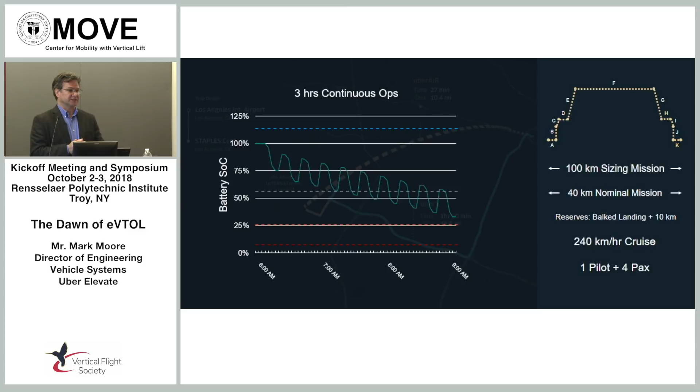But if you push to really high disk loading, for instance, like the Lilium concept, there's all sorts of problems that happen there, where high disk loading requires really high C rates in the batteries, high discharge rates. That's problematic. And so what we're about is being able to achieve essentially the 60-mile longest trip distance.

But also what's actually more important is that we can fly for 3 hours during the peak in the morning and the peak in the afternoon, and at most sit on the ground for 5 minutes when we load and unload passengers and get a little bit of recharge, enough to keep us going, so that essentially we have this sawtooth distribution.

We're constantly running the battery capacity down, which is the vertical axis, but we're able in that 5 minutes just to get enough charge so that we can do the next 25-mile average mission, get a little recharge, bounce the energy state back up, so that for 3 hours straight we can operate just with those 5-minute loads and unloads recharges. That's the harder mission that we're designing for.

So just a little bit more of this trade-off of cruise efficiency and disk loading or hover power required. You can see multicopters really inefficient at cruise, going across the horizontal axis to the right, a tilt duct with high disk loading like the Lilium concept going up to require a megawatt of power in hover. So the sweet spot is kind of in that corner, right? Which compounds have been trying to achieve for 30, 40 years.

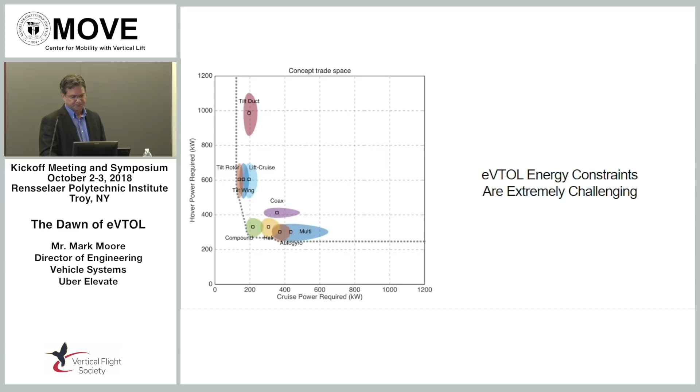But in my perspective, since the mission is just really short in terms of the hover requirement, you want to bias more towards a little bit more power and a little bit more cruise efficiency than where compounds are or have tried to get to. So it is a very challenging set of energetic constraints that exist.

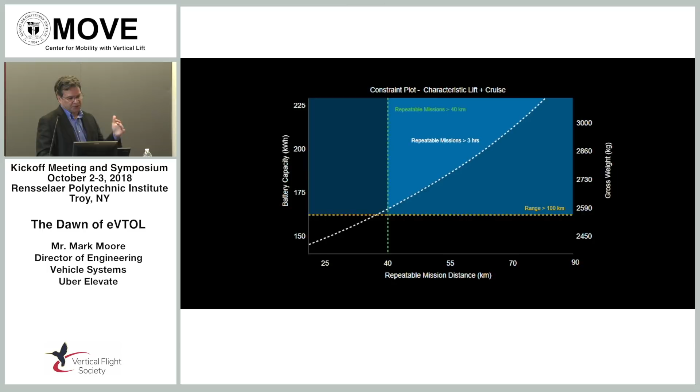So again, for that 60-mile range, for an average 4-passenger vehicle plus a pilot, which tends to be, from our different sizings, anywhere from 4,000 to 6,000 pound vehicles. Then in order to be able to do the repeatability, that sets essentially a constraint. And you can see that the battery size for that 4-person plus 1 pilot vehicle ends up being at least in this 160 kilowatt hour pack size, which is quite a bit bigger than where the automotive world is now, which is 100 kilowatt hours and below.

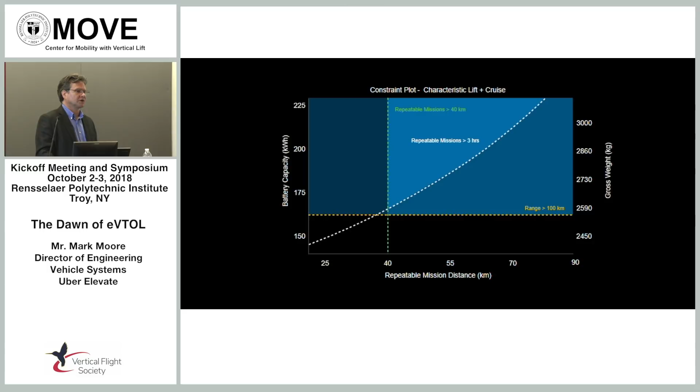So the energetics are definitely challenging, but even with the current 250 watt hour per kilogram cells, they are very close to getting what we need. The harder part is not actually the specific energy, it's that rapid recharge. And so right now the cells are just not quite good enough to do that rapid recharge unless we drastically

reduce the cycle life. We'd like to have 2,000 cycles on these batteries so we can amortize them and they can be well affordable. Right now, they're in the few hundreds, on the order of 500, if we abuse these batteries with these rapid recharges. So very much we need to push to chemistries and to liquid cooling systems that can get that heat out or distribute the heat or not have the heat with low resistance internals.

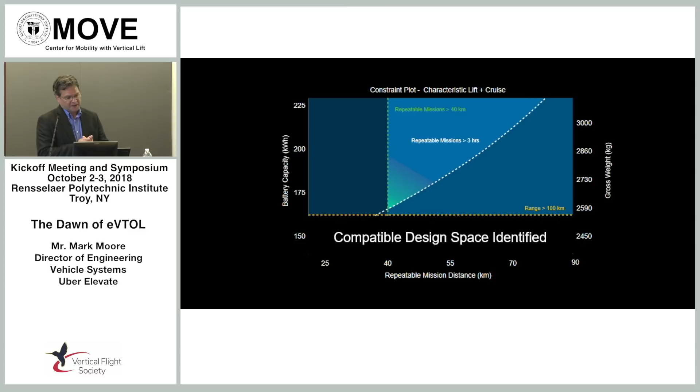So in terms of different concepts out there, we do competitive analysis, comparative analysis across the different concepts so that we understand what's good or bad for our missions. Again, we're not designing aircraft for pleasure, but to understand the competitive landscape and what will best serve our market needs. So just a little bit about some of them that you've seen that are real vehicles.

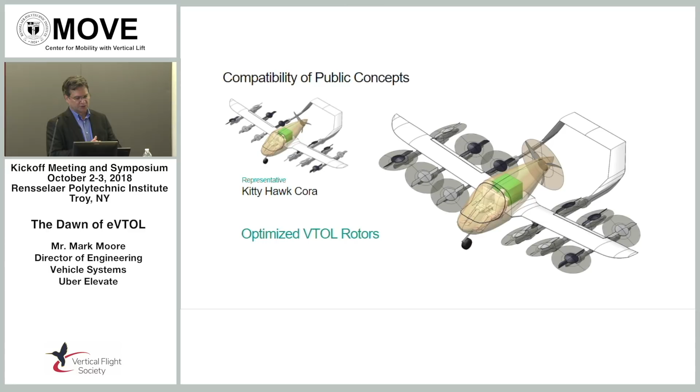So you have the Kitty Hawk Cora, which is flying today, really has made this decision, as a lift plus cruise, to be as dead simple as possible, right? The smart strategy in aerospace, KISS, keep it simple. No articulation, no moving parts, but the price you pay for that is lots of parasite drag.

So this aircraft can go 110 miles per hour, but the L over D max is much closer to 70, 80 miles per hour. And when you have a severe energy constraint, you want to be cruising at that lower speed. So a 70 to 80 mile per hour vehicle just isn't going to meet our needs. And especially trying to make money with a 2-passenger vehicle is just not the throughput that we need.

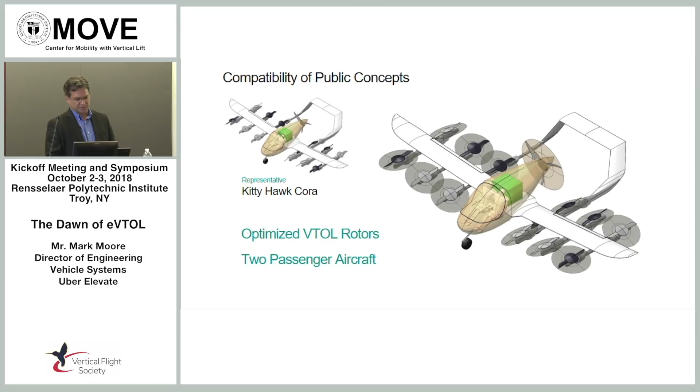So again, looking at other concepts, you have the Joby S4. Again, from public disclosures, that is actively flying. It's a full-size vehicle that has done many transitions and cruised. And they're kind of like at the opposite end of the KISS, right? They're embracing quite a bit of complexity where they have 6 tilt rotors. And you know, that's one of the things we're trying to get away from with helicopters, right? We're trying to get away from those 10-hour inspection intervals or high maintenance costs.

And it's interesting as you compare these two vehicles, the Joby is very capable. It's a high-speed aircraft, no question about it, from our analysis, but they're, again, at two different ends of the extremes. And as an aircraft designer, I can tell you, the right answer is typically somewhere in the middle. And so I'm definitely looking for the concepts that can have the high reliability and low maintenance costs of a Cora, but the speed and productivity of a Joby S4. So that's my ideal world.

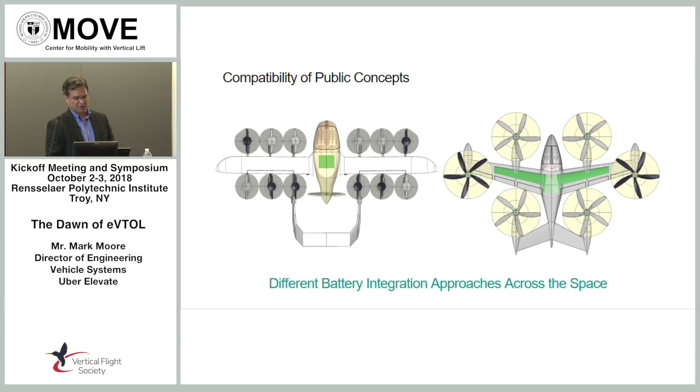So I am a big believer that we're just in the first generation of distributed electric propulsion, and that most of the concepts are pretty brute force-ish. They are flying Cuisinarts. They're just propellers all over the place. And I think in the future we're going to be able to do a lot better than that, but it's going to require especially the universities and the government labs and small companies being willing to invest in new technologies that especially take advantage of these electric motors and digital controllers.

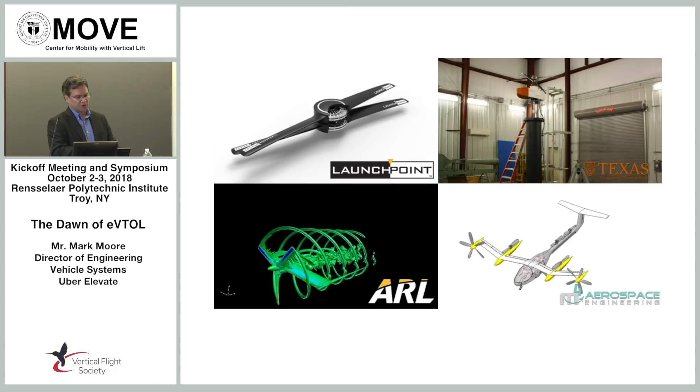So one technology that we're excited to be working on with the Army and UT Austin is stacked co-rotating rotors. And I say that this is an electric technology because what's really unique about it is this ability to have two independent motors, each one can control its own rotor, but they can be synchronized with great precision. So we can have the rotors with any azimuth separation; at low speeds, at high speeds, they can keep that azimuth separation. Now, why is that interesting?

Because Sikorsky and others have proven that this gets you an improvement in your figure of merit and an improvement in noise. They're not huge, 4 to 6% figure of merit increase, 2 to 3 dB decrease, but both are going in the same direction. And we have this ability to now stow the props because each one is driven independently by a motor and have a relatively clean interface.

And in fact, if you think about it, like for the Joby S4 concept, as it's going through transition, it's doing that 90-degree rotation. So the cyclic forces, which are 10 times bigger than the normal forces in axial flow, are all being transmitted into that articulation. So it's a really complex articulation in terms of loads.

What's neat about the stacked co-rotating technology is that we can pop these motors up and with a simple cam mechanism, pop it out of a nacelle, and there's no loads on it during that articulation. The cyclic loads don't start until we start rotating that rotor. So to me, if we're going to embrace articulation, it's embracing smart articulation with very low loads on that articulation mechanism.

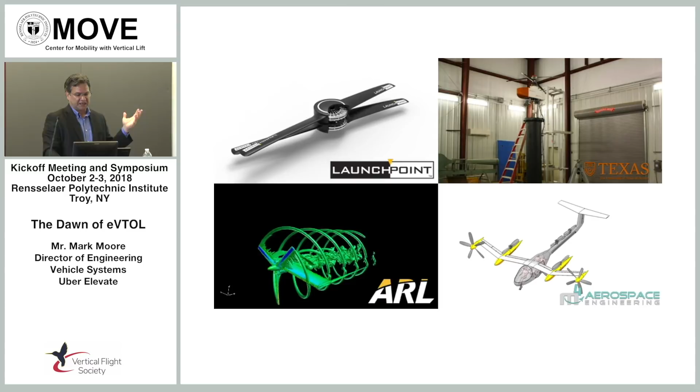Here you see, again, we're never going to build this vehicle. We're showing this as a vision concept that could utilize this stacked co-rotating technology. Again, not counter-rotating, but co-rotating. All right, so I'm going way too long because I'm too excited about the different things.

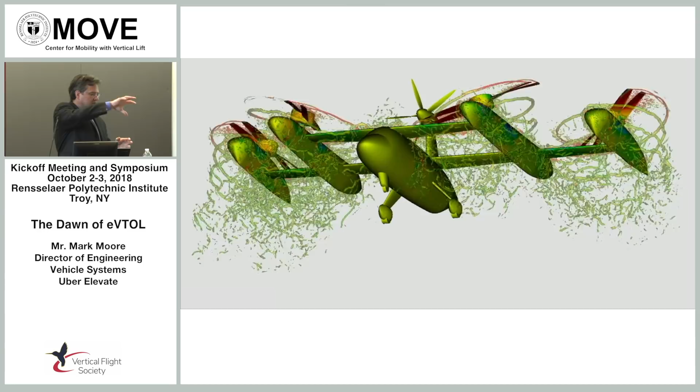I just wanted to mention briefly, we're getting into really tightly coupled aeropropulsive problems here, and that really demands great new tool sets or applications of tools that have been developed in new ways. And so a lot of what we're doing, especially with our partners, is trying to advance the tools and prove out across the variable fidelity tool sets from CHARM to OVERFLOW and PowerFLOW and vortex particle codes, everything in between, how we can do rapid design or how we can help them do rapid design by proving out the lower fidelity tool sets.

And we're focusing on one specific area, and that is acoustics. They're designing the vehicles. They're the experts at designing the vehicles. But not enough attention has been put into achieving great acoustic signatures and low community noise. So we think that's a key differentiator that we want to enable our partners to be the best on the planet at, because we know that that is going to be the challenge for us to get into the market with these services as we talk communities into having skyports very, very close to where they live and work.

So as you see us develop these different concepts, they're nothing more than the equivalent of concept cars. They're never going to go into production. But speaking of production, we've got to realize that these vehicles need to be designed to achieve production rates that haven't been seen since World War II. We need thousands of each one of these aircraft being manufactured per year. And in a relative few years, we see the need for 10,000 units per year being produced for our needs.

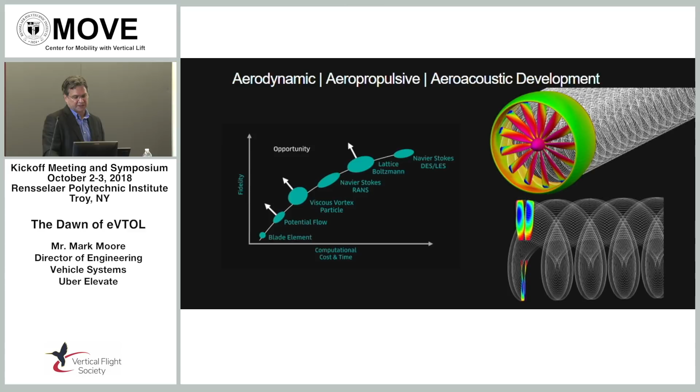So we think that there's this natural blending of the automotive and aerospace markets that needs to occur, and we're trying to help facilitate that, again, with and through our partners. So again, there's so much interesting variable fidelity tool work to do and to talk about, and again, we're excited that we're doing some of that work with the Army, as they have an incredible expertise, especially in this area of close coupling aeropropulsive problems.

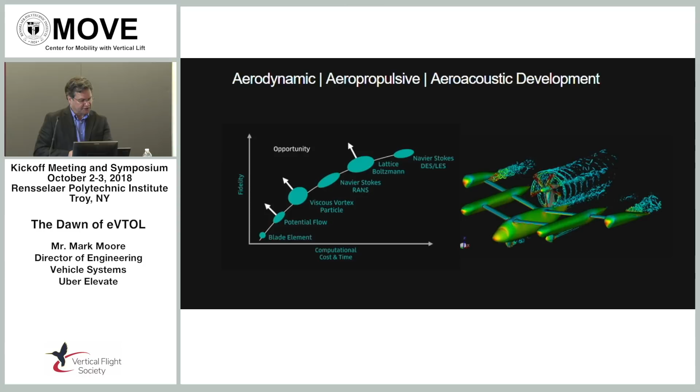So I'm just going to end. I've talked only about the vehicles because I'm a vehicle guy, but the feasibility of this market is not just about the vehicles. It's about this whole ecosystem coming together. And this ecosystem has to be designed for the masses. Again, we have 10 million riders a day at Uber. And we're growing somewhere between 70% and 120% per year. So we've got a lot of customers that are ready to ride in your vehicles. We just need to put all the different pieces together.

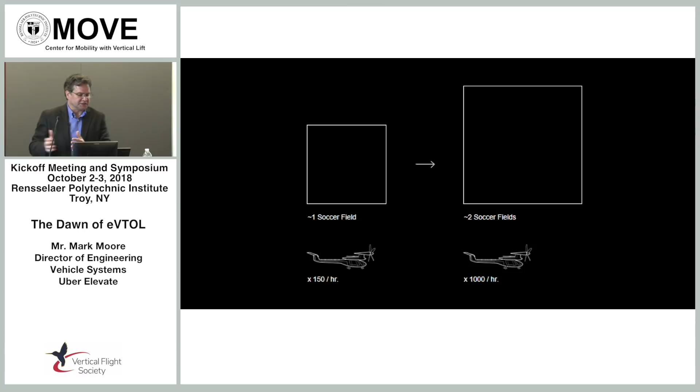Well, you know, we have a crawl, walk, run strategy. So in the beginning, we're going to adapt elevated parking garages and take advantage of that top deck in order to put several different pads. You'll notice that we tend to do this layering effect where we can have essentially storage for the vehicles and emergency landing pads also embedded into the design.

But as I show you several different solutions, because we invited some of the top architectural firms to actually ideate with us and develop different skyports, you'll notice that each of them tends to be elevated above the ground to help get that noise signature away from people on the ground, but also be co-located with ground transportation, roads, major thoroughfares. And that's both because we need to be multimodal, we need to connect into other ground transportation, and because we want to take advantage of the noise that those cars already make, and ideally even blend into that signature and design these aircraft to have the same signature as those highways.

And that's one of the reasons why we've already collected about 6 months' worth of highway data at different potential vertiport locations, so that we can see exactly what that spectra looks like and figure out how we can help our partners design to map in and hide within that noise band that already exists. So many different ideas for what vertiports will look like.

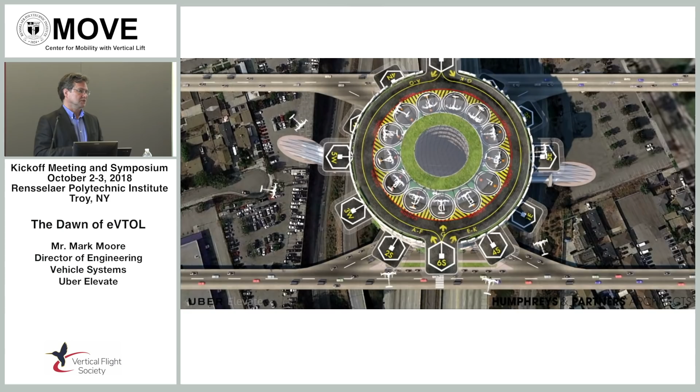I'm excited that Mike mentioned ASTM. We're developing a vertiport standard, which is a bit different than the heliport standard that was developed previously by the FAA. And it's interesting to note, before it was just the FAA that developed that heliport standard. Now we're actually doing it in a consensus-based way so that many more voices can have an input to what those standards actually are. So I'm really jazzed that consensus-based standards are being supported by the FAA, and that's why Part 23 is going to be the mechanism for these aircraft to be certified in the near term.

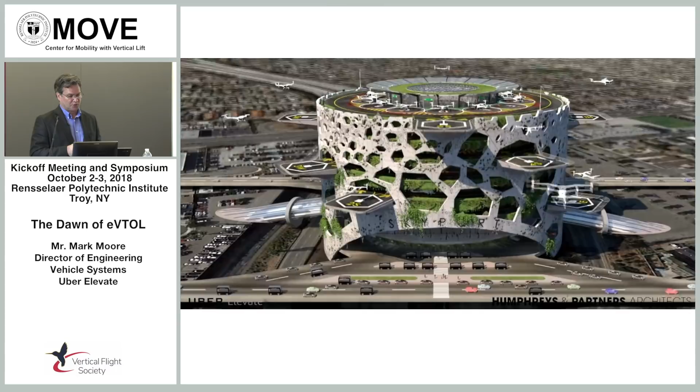So lots of wild ideas by the different architectural firms on how we can get to very, very high throughput and have a compact signature in the urban core. So one last thing, my last slide, I'll just say it's not just about moving people around. We've announced that we're developing an Uber Eats drone. Uber Eats is growing even faster than our ground service at insane rates, and it's over $7 billion a year in revenue for us. So what better mission for drones than delivering food?

And this goes back to Pete's comment, right? It's all about reach. And he talked about the golden hour. Well, we've got the delicious 10 minutes instead of the golden hour. And that is, if your French fries are more than 10 minutes old, no matter what your packaging is, they get soggy and gross.

So drones give us this ability to have greater reach, so that each one of our restaurant partners, instead of only being able to serve a 2.5 mile distance away, actually I think it's 1.5 miles radius. Now as we can increase that to 5 or 10 miles, the number of customers that that one restaurant can serve is the square of that difference. So with an Uber Eats drone, we can easily get to somewhere between 10 to 100 times more customers per restaurant. So that's a really exciting value proposition.